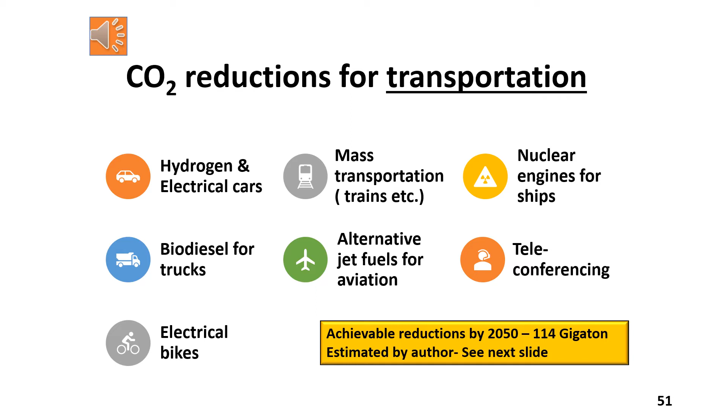The transportation sector can potentially reduce carbon dioxide emissions by 114 gigaton during the period from 2020 to 2050. Figure 22 shows how this may be achieved, using a variety of technologies, such as hydrogen as fuel, electrical cars, mass transportation, and improved ships, trucks and airplanes. Significant developments and commercialization efforts are taking place in Europe, the USA, Japan, Korea, and China.

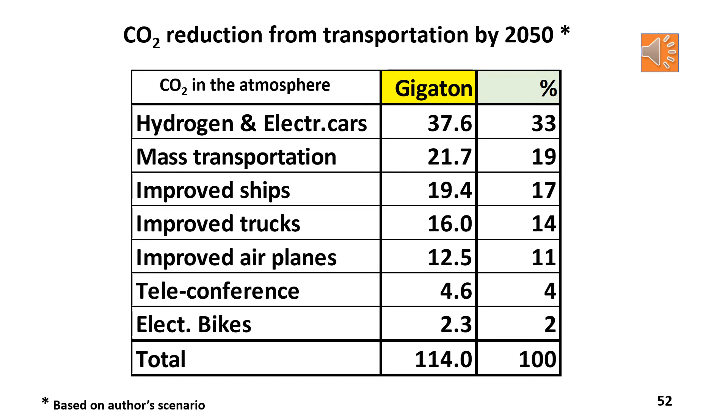Figure 23 provides a breakdown of the various technologies that can reduce carbon dioxide in the transportation sector. Hydrogen as fuel, electrical cars, and mass transportation will have the biggest impacts. This is followed by improved ships, trucks, and airplanes. Teleconferencing and electrical bikes are also mentioned, with relatively smaller carbon dioxide reduction potential.

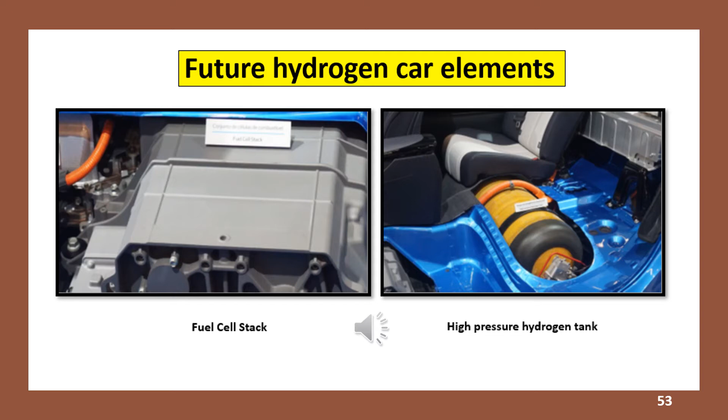Future hydrogen car elements are shown in Figure 24. The fuel cell stack is applied as the car's engine. Below the passenger seats, one places a high-pressure tank for the hydrogen fuel. This shows a picture of a BMW hydrogen fuel cell car. The success of this and similar cars will depend on the price of hydrogen, ideally made by water electrolysis using sustainable electricity, not based on fossil fuels.

Current fuels and chemicals are still largely made from fossil sources. In the industry sector, fuels and chemicals from sustainable resources can lead to a reduction of carbon dioxide emissions. It may take some time to transform the industry sector before industry will make their products using greener technologies, but several companies are already working on this and have shown great technical progress.

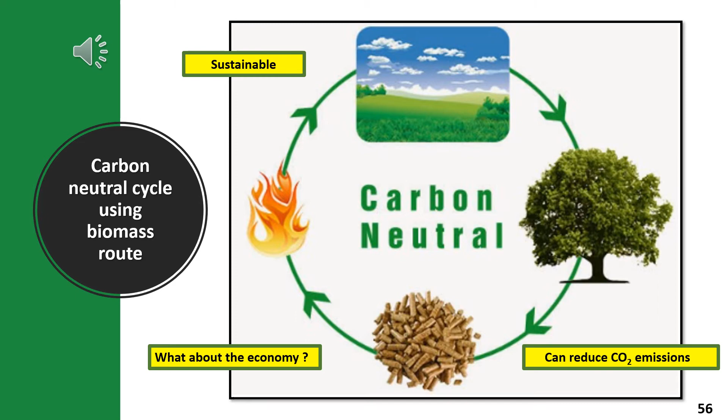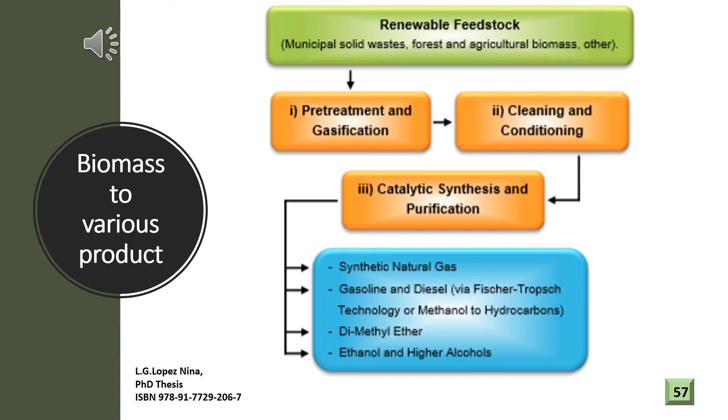Biomass, municipal solid waste and other carbon-containing streams can be used to produce biosynthetic natural gas, biojet fuel, green methanol, and green ammonia. This is schematically shown in Figure 27. In general, one needs a pretreatment step and gasification of the feed, followed by further cleaning and conditioning. Subsequently, a selected catalytic step can then make the desired product.

The design product is aviation jet fuel, produced at a rate of 10 million gallons a year, from 200,000 ton of MSW per year. The Reno plant started production in 2019. Several strategic partners have been involved, including Cathay Pacific Airlines, United Airlines, and BP.

The economics of this technology show that MSW conversion can potentially be very attractive. The required selling price is primarily controlled by the costs of the raw materials. Since one only needs to pay for the sorting of the MSW feed, one receives a tipping fee credit from the landfill company, which makes the raw material costs negligible.

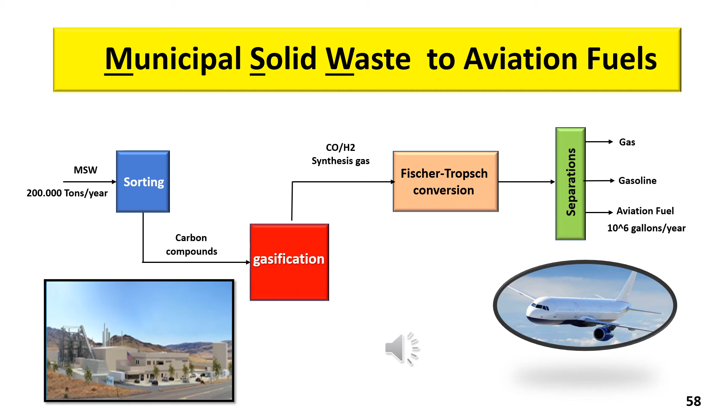Biomass is pre-treated to reduce its size and moisture content. The biomass feed is then sent to a special gasification reactor system, with an added cleanup section. The clean syngas is converted into DME, using a novel fixed-bed tubular catalytic reactor. This reactor contains a porous sorbent that removes the in situ produced steam and enhances the DME yield.

Additional hydrogen can be produced by water electrolysis, using renewable electricity. This enhances the DME production and supports the power-to-liquid conversion. The produced DME can be used as biofuel, and this will increase the sustainability of the automotive transportation sector, substituting conventional fossil fuels.

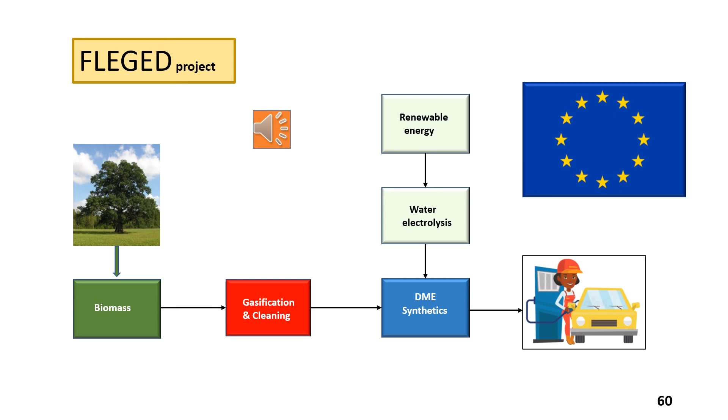The FLEDGED reactor system combines a gasification reactor, to be integrated with a combustor reactor. The gasification reactor requires steam, and it produces mainly hydrogen, carbon monoxide, carbon dioxide, and char. In the gasification reactor, solid calcium oxide reacts with carbon dioxide, producing calcium carbonate. This allows to adjust the syngas composition to the specifications of the downstream DME reactor. In the combustor, residual char from the gasification reactor is burned with air, decomposing calcium carbonate back to calcium oxide and carbon dioxide.

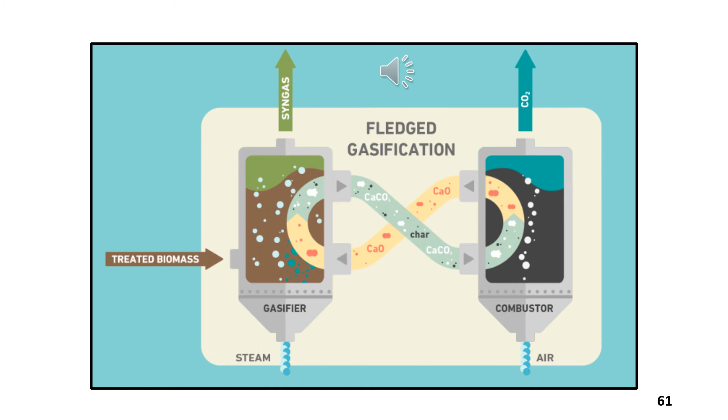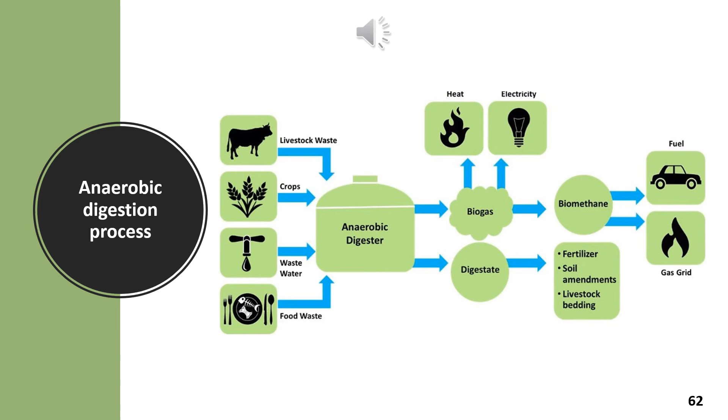The biogas is used for transportation or sent as biosynthetic methane to the grid. The digestion byproduct has also attractive uses. Ultimately, most of the products end up as carbon dioxide again. For this reason, this technology is a carbon-neutral approach, at least to a large extent.

Waste plastic products are becoming an environmental problem. At Northwestern University, in cooperation with scientists at the Argonne National Laboratory and the Ames Laboratory, a technology is under development, making lubrication oil from plastic materials. Their scientists propose to use platinum nanoparticles on perovskite nanotubes as catalyst, for the hydrogenation of the plastic waste products.

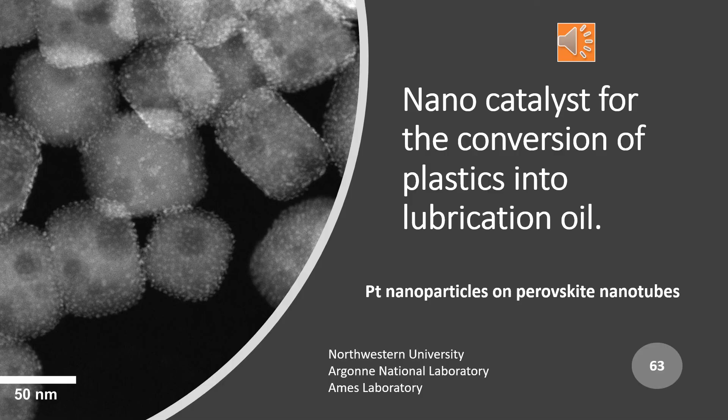This thin layer has low gas permeability, needed for liquids like beer and carbonated soft drinks. The paper bottles can reduce the carbon footprint by 30%, relative to glass bottles. Avantium is pursuing similar applications for their special sustainable polymer.

In reference 21, related to the publication by Paul Hawken, many approaches are listed to reverse the global temperature increase. Of special interest, education and family planning are highlighted. By applying this, we could potentially reduce carbon dioxide emissions by 119.2 gigaton, if applied during the next 30 years. One hopes that with education and family planning, the total world population will not increase as fast as projected currently.